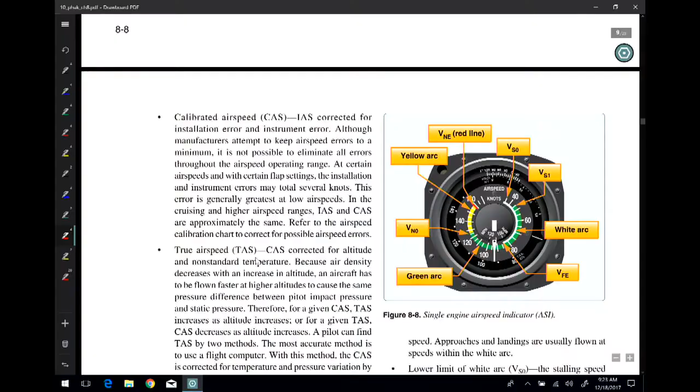Okay, now let's look at the face of the airspeed indicator. Let me see if I can go bigger here. Stand by. Here we go. So let's look at this.

Now you'll notice here that we have several things going on. First of all, we have several yellow annoying boxes. But those annoying boxes are going to show us some things here that are really pretty cool. This is something else, guys, that you're going to have to know - what these things are and what they mean for your individual aircraft. So we have an airspeed indicator.

Notice that the indication here is in knots. Well, what else could it be in? It might be in miles per hour if you have an older airplane, because some of the older airplanes actually used miles per hour as opposed to knots. So this is using knots, not miles per hour.

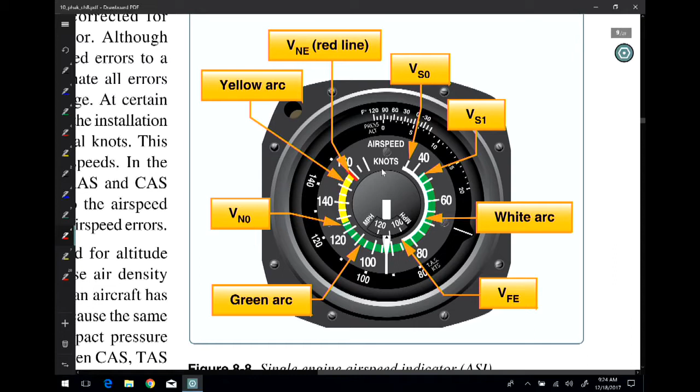And so we look here - I'm going to do this because I need to be able to draw on this thing. So let's do this. You'll notice here at this portion of the instrument that we have a very low number. As we move around this way, we get a higher number, okay? So as that needle moves around, the lower numbers are going to be here, and then the needle moves around clockwise to show higher numbers there, okay? That's kind of how this thing works.

We notice also on this that we have a couple of things going on here. This part of this I'll talk about in a little bit. Some of the airspeed indicators have this, some of them don't. The backup airspeed indicator that we have in the Diamonds, they do not have this. But we'll notice something here kind of right off the bat.

First of all, we notice that we have this white arc right there. Okay, so notice the white arc. Next, notice the fact that there is also a green arc, okay? Notice that. Then we have, as more colors, a yellow arc. Notice that. Then we have this red line right there, okay?

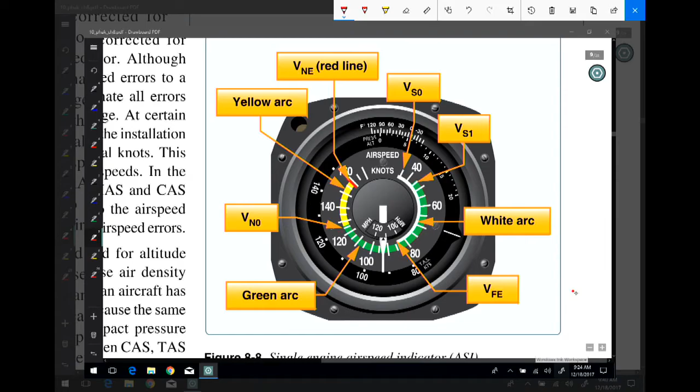Wow, okay, let me get out of this. Come on, baby. Okay, there's that. All right.

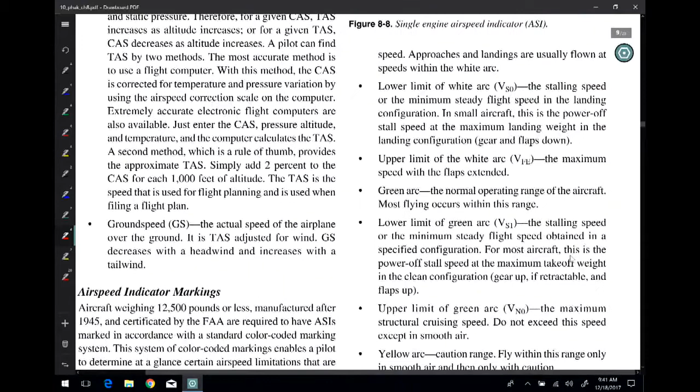Okay, the bullet points down below this will go through some of these V-speeds. And when you go through these, you need to know these V-speeds. You need to know these V-speeds.

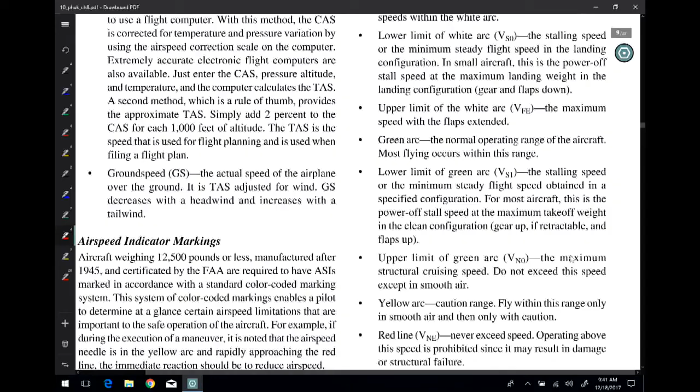Now then, we're going to talk about something else called VA. When you look at your books, there is something called VA. This is a biggie.

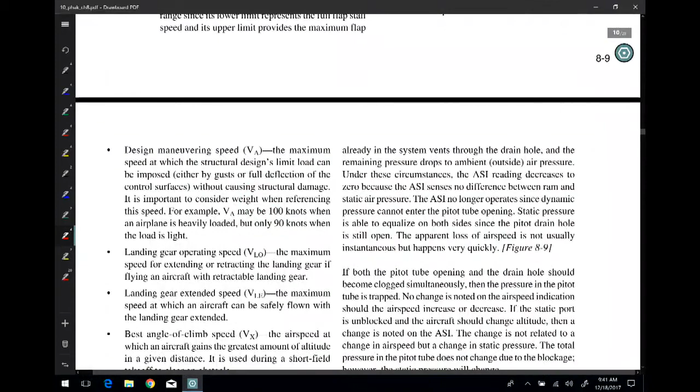VA is something that we refer to as maneuvering speed. The Cirrus, I think, calls it VO. And then there are other aircraft where you have different things, like VP, as in Paul, as in penetration, turbulent penetration speed. It's just kind of weird. VA, maneuvering speed, that's the one that you need to know. And as long as you know what that means, you can apply it to whatever V speed your airplane happens to tell you that it is. Okay, VA, it is maneuvering speed.

What that means is this: that is the maximum speed at which you can apply one full deflection of one control surface, a primary control surface, without structural damage to the airplane.

For instance, let's say hypothetically you live in the mountains. You get some mountain wave, some turbulence, things are starting to get a little lumpy. You want to slow that airplane down to that VA, at least, and no more, whatever that speed happens to be for your airplane, because you can get updrafts, downdrafts, side drafts, wind shear, Lord knows what can happen. It's weather in a blender sometimes. And what can happen is that to keep your wings level, you may have to really work on the controls to maintain control of your aircraft.

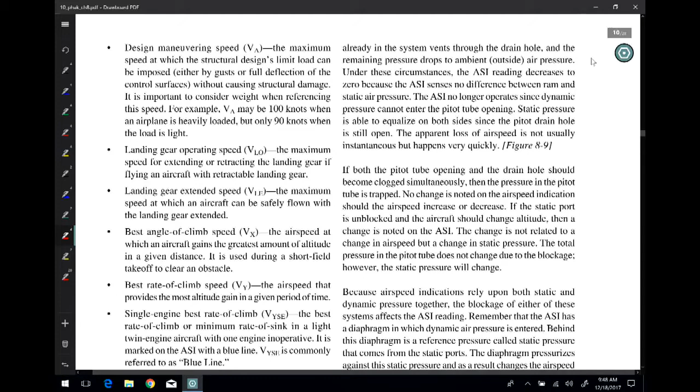You have other things that really kind of make sense. VLO, this is your landing gear operating speed. That doesn't mean in all conditions. VLO, the maximum speed of extending or retracting the landing gear if flying an aircraft with retractable gear. It depends on the airplane, because you could have an airplane where you can put the gear out at 150 knots, but you have to have them sucked up before you get to 110 knots. So again, it kind of depends.

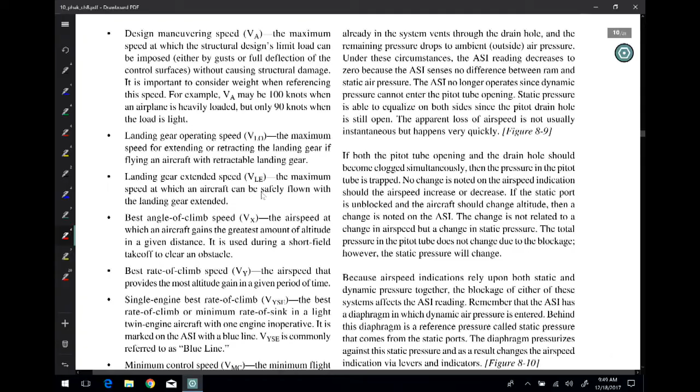And so you have VLE, landing gear extended speed. So that's kind of where you have different V speeds for whether or not you put them out or whether you suck them up. Then we have something here called VX and VY.

Okay, now here's VX and VY. These have to do with takeoff speeds. In most cases, we take off with an airplane with one notch of flaps, the first notch of flaps. Remember what happens: it extends the actual chord line of our wing, giving us greater lift, especially when we need it to get off the ground in a hurry. But we also know that as we're climbing out, we reach a certain point of diminishing return where those flaps actually hurt us more than they help us. So at some point we need to suck those flaps up, get clean and get some speed.

But to get up and out, we have a couple of different options. We can look at a higher angle of taking off, to clear this mythical FAA 50-foot tree at the end of our runway. So we may need a better angle to get up and out to clear an obstacle, or we may not have any obstacles and we want the most efficient use of a climb to give us a better rate. Okay, so here's what you need to know.

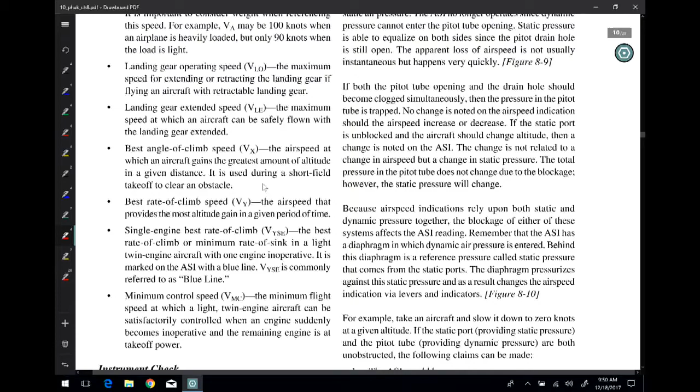VX, I'm going to draw here a little bit. VX gives us the greatest gain of altitude for a given distance, and in this, it is the best angle. VX, the greatest gain of altitude in a given distance. Angle.

VY gives us the greatest gain of altitude over a period of time. It is about rate. VX, angle, greatest amount of altitude over a given distance—this gets us up and over that 50-foot tree at the end of the runway. VY gives us the greatest gain of altitude over time; it is a better rate.

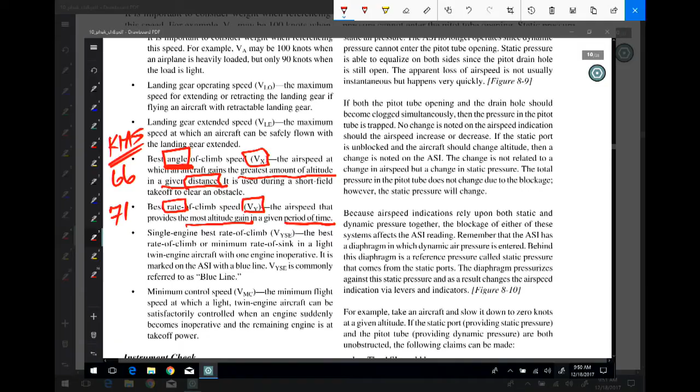Here's what that's going to look like. And if we think about this in indicated airspeed, this could be 66 knots, this could be 71 knots. 66 knots, 71 knots—what does that mean? Well, if we're at full power, we want full power, we're trying to get up and out to give us the best.

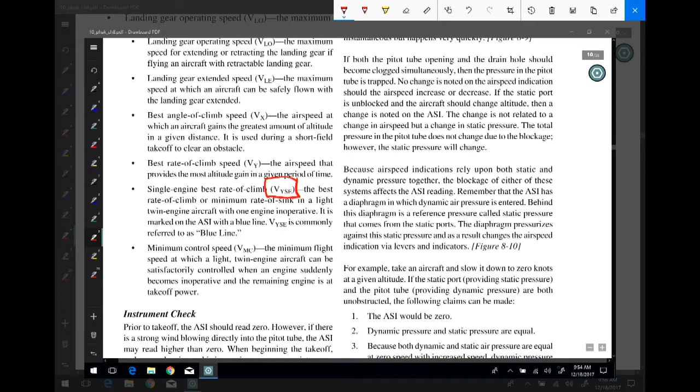This again has to do with single engine operation—not single engine airplanes, but multi-engine aircraft that, when you lose an engine, now you are a single in a multi. The aerodynamics and the power and everything else becomes quite a bit different in these, and so there are other speeds that you need to kind of check. So that's kind of it on the airspeed things.

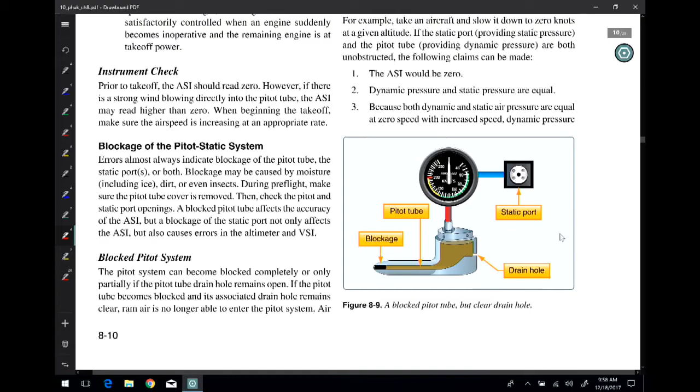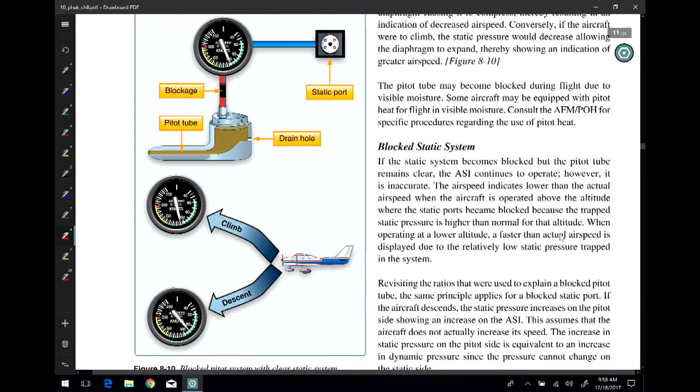But that really doesn't happen very often, and the reason is because in addition to this system, you also have an alternate static port you can open inside the cabin. The pressure is a little different inside than outside, even in a non-pressurized setting, but it's close enough to give you safer operations. You just have to know the pressure inside is a little lower than outside, but not enough to make a huge difference in safe operation of your airplane. So again, if you get them both blocked, that's kind of how that's going to work. Blocked static system—if these get blocked, this tells you what happens if you get everything blocked in these systems.

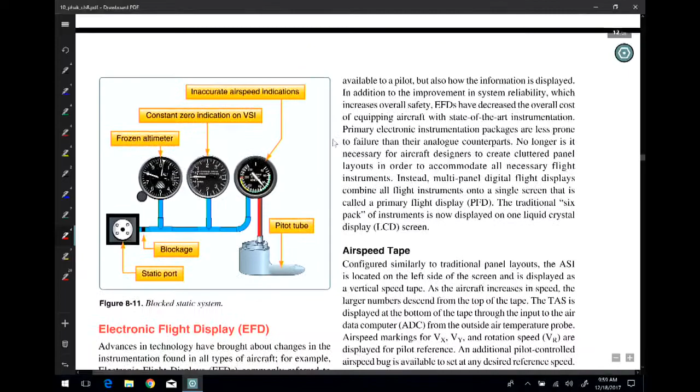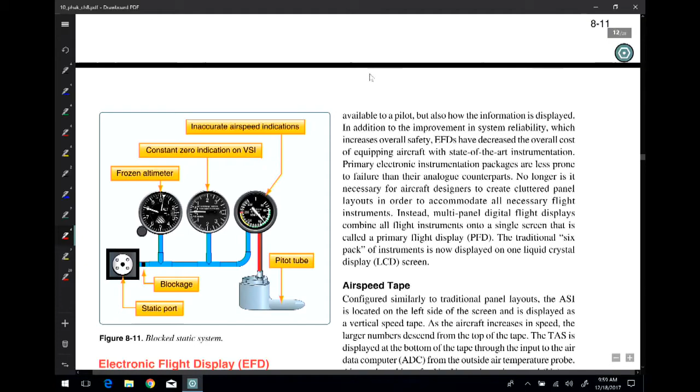And we're going to get to the electronic flight displays here in just a second. One of the things I do want to point out is let's say you have an emergency, and let me open this up because I want to look at this. Give me just a second here, guys, I'm trying to adjust this, and then I want to go this way. Here we go, stand by.

Okay, now let's say this gets blocked, let's say this gets blocked, and let's say that your alternate static inside your airplane—remember that first illustration showed the alternate static, meaning you have a little switch you can open inside the cabin to open that system up to at least the pressure inside the airplane—let's say that didn't work. So we've had one, two, three failures here of this static system. What could you do?

You break the glass on your vertical speed indicator. Why? Because it opens up that system again to the pressure inside the cockpit at least, so it acts sort of like an alternate static system, and it's also the cheapest instrument to replace. So that's what you do. If you get a complete pitot-static system blockage and the alternate static fails, break the glass on the vertical speed indicator, and that'll open up that system again to at least the pressure inside the airplane. It's an old trick, just saying.

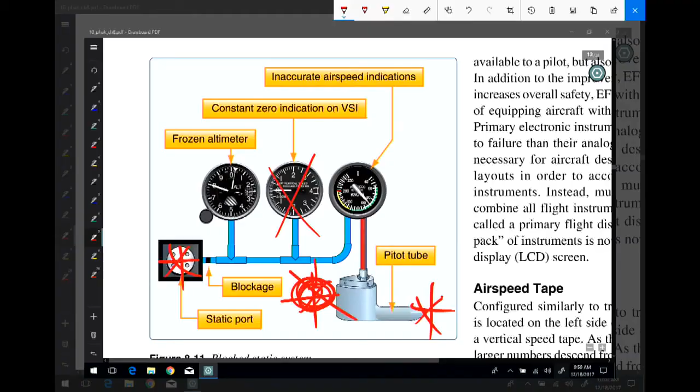Okay, now let's get back to this. Close this, scoot this over. There's—oops, hang on, there's that. All right, now then, now we start looking at things sort of the way they look in the Diamond DA40.

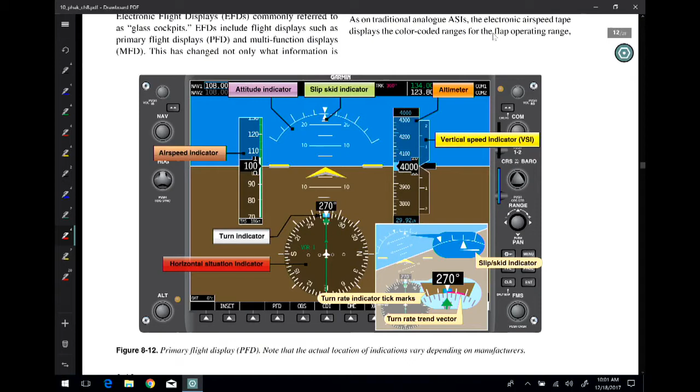This is the Garmin G1000. Now instead of these round gauges like we talked about before with the pitot-static system, now we're looking at tapes. So remember, on this display, here is your altimeter, here is your airspeed indicator, here is your vertical speed, so here's your VSI. Here's your altimeter, here's your airspeed indicator, okay?